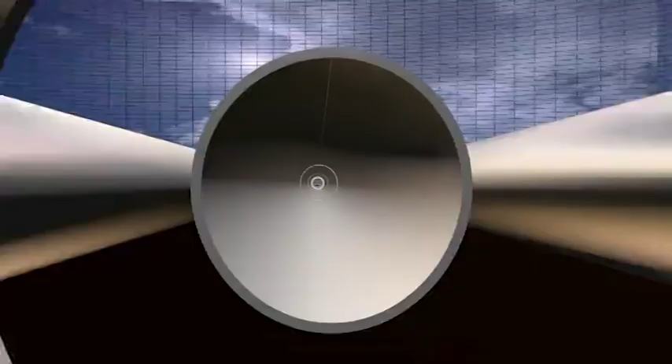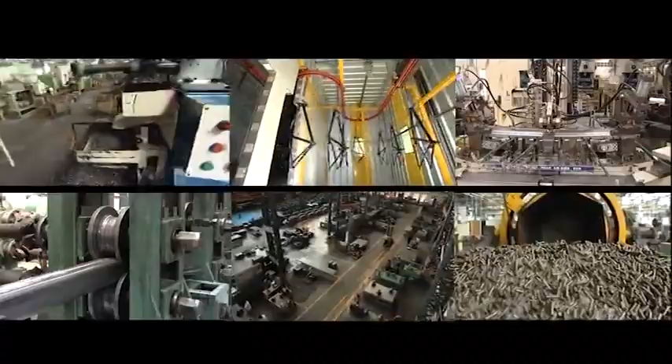One of the leading business houses in India, the Murugappa Group is a diverse conglomerate with interests that span many industries. Since 1949, Tube Investments of India Limited, the engineering arm of the Murugappa Group, has grown into an enterprise with a turnover of 5,000 crore Indian rupees, with products ranging from bicycles, automotive parts, chains for two-wheelers, industrial chains, and railway structurals.

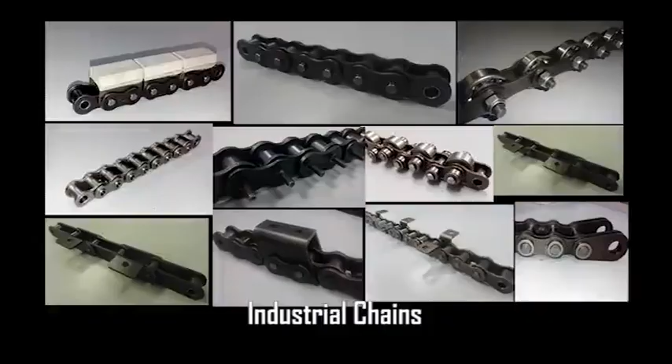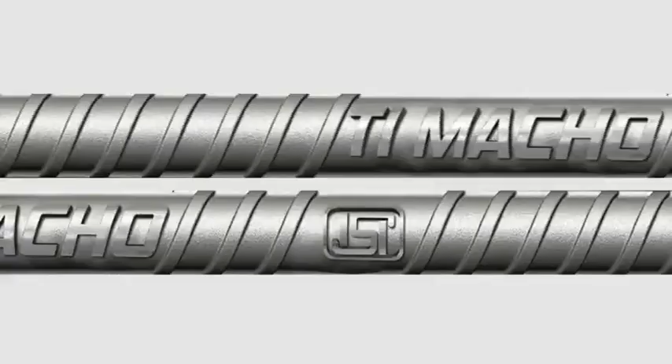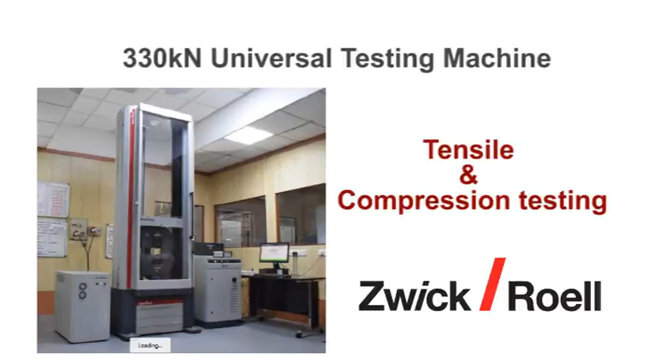The value-conscious Indian customer is migrating towards higher quality, higher strength, higher performance structural steels in his quest for reliable infrastructure development. This is presenting a unique challenge to TMT bar manufacturers who are largely from the unorganized sector and has turned into an opportunity for TI. Marketed under the brand of TI Macho, TI has brought its quality definitions and processing standards for specialty steel, developed over 70 years of its existence, to deliver higher levels of performance in TMT bars.

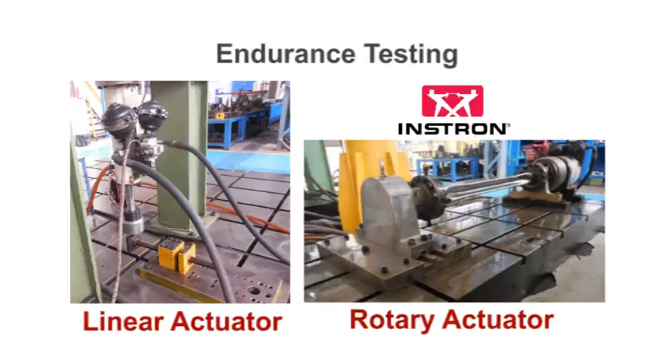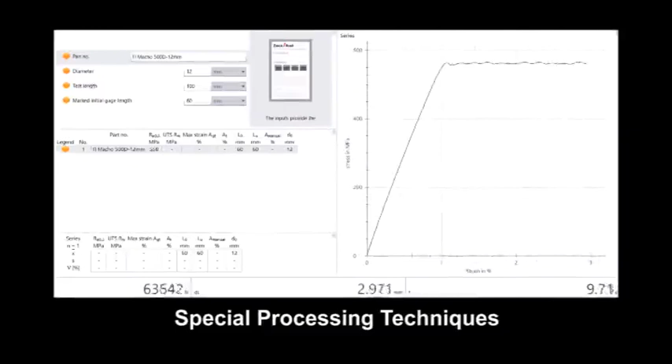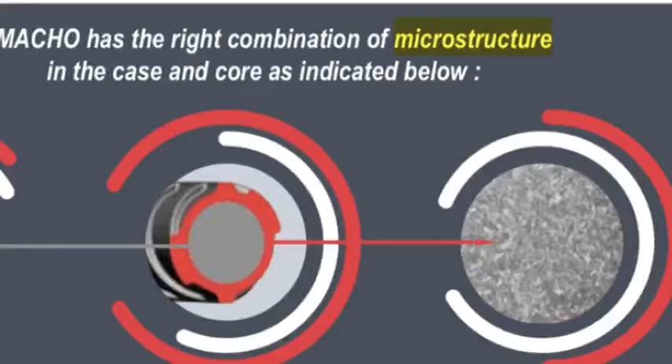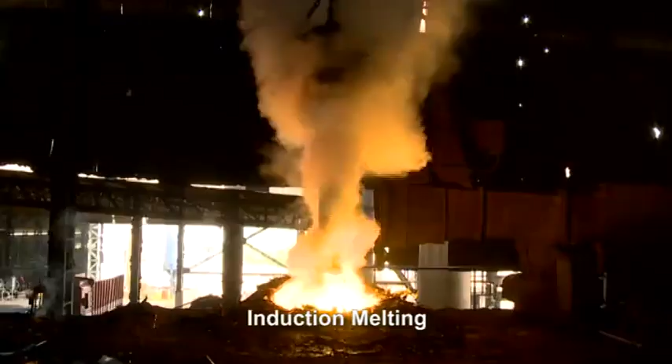The Technology Center of TI spent 1 year benchmarking the best TMT bars available in the Indian market by testing and identified desirable characteristics and performance parameters to be built into TI Macho TMT bars through special processing techniques. So, what is special about the manufacture of TI Macho branded TMT bars? High quality raw material with very low phosphorus and sulfur content is used with sponge iron to meet exacting chemistry requirements of liquid steel in induction melting furnaces.

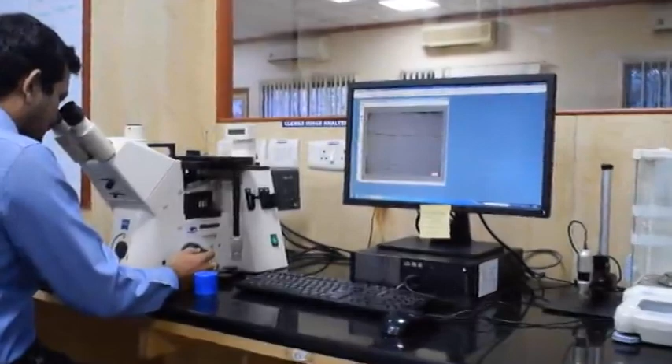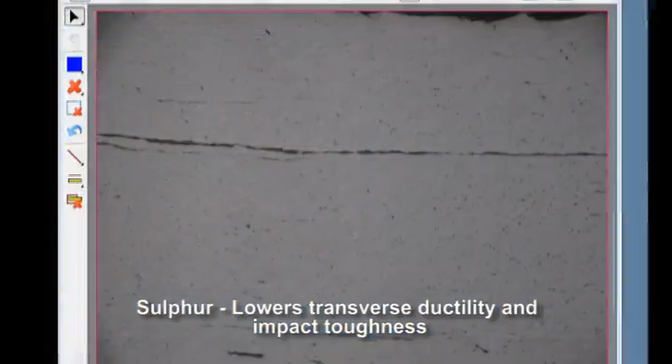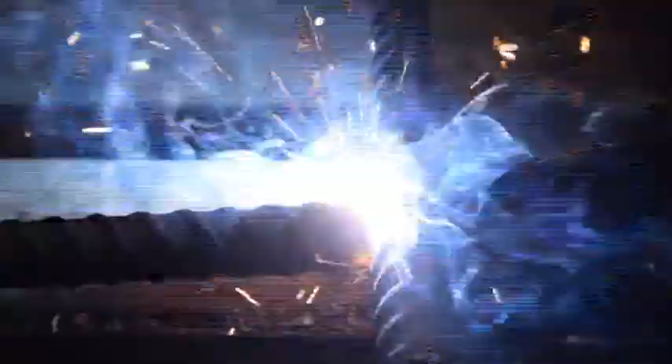Phosphorus and sulfur are impurities which bring down steel performance, and their limits are specified in the Indian standards. Sulfur lowers transverse ductility and impact toughness, both properties being related to shock resistance. Phosphorus, on the other hand, lowers ductility, toughness, and weldability in TMT bars. That is why TI Macho TMT bars routinely maintain lower levels of phosphorus and sulfur, which lets high strength be retained with higher ductility after heat treatment. It also allows the bars to be welded easily with no crack formation during welding.

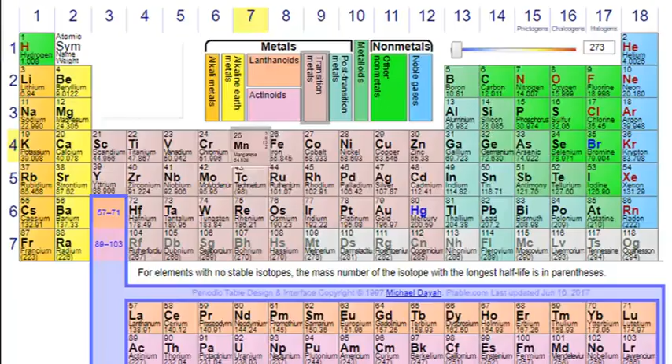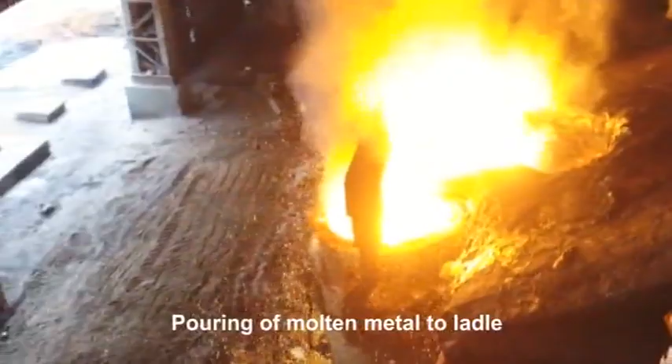Manganese is another element which helps increase the strength of the bar by promoting hardenability and increasing core strength. Manganese becomes all the more important as the diameters of the bar increase, and larger diameters of TI Macho TMT bars have higher percentages of manganese to help maintain higher strengths. The liquid steel is then transferred from the furnace into a ladle. The actual chemistry of each batch is checked by taking a sample from the liquid steel and verifying the chemical content using a spectrometer.

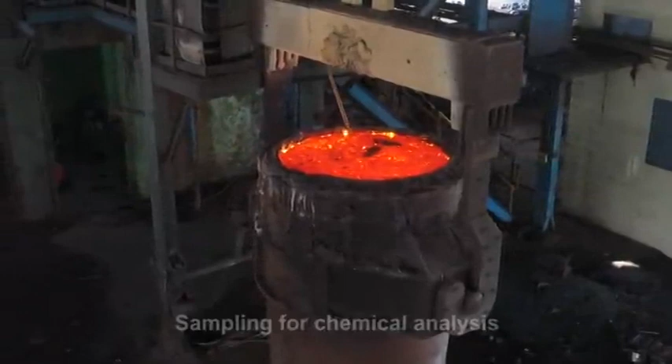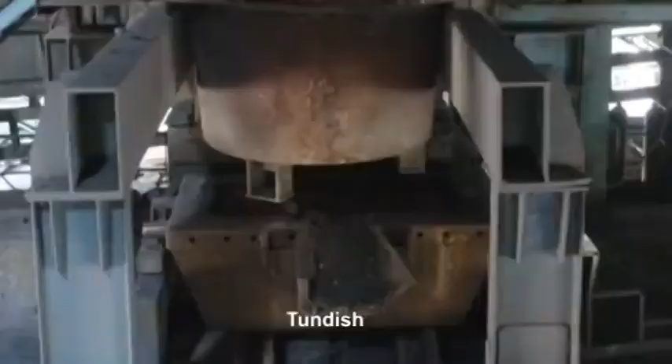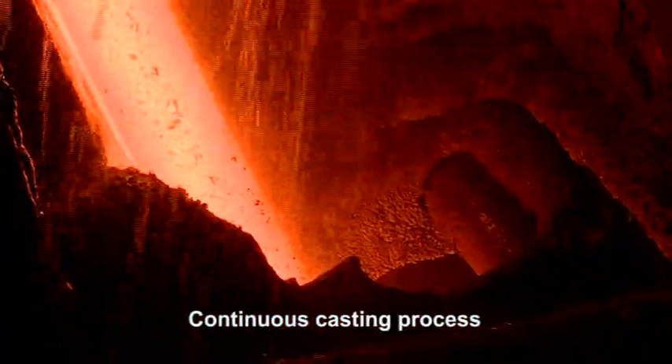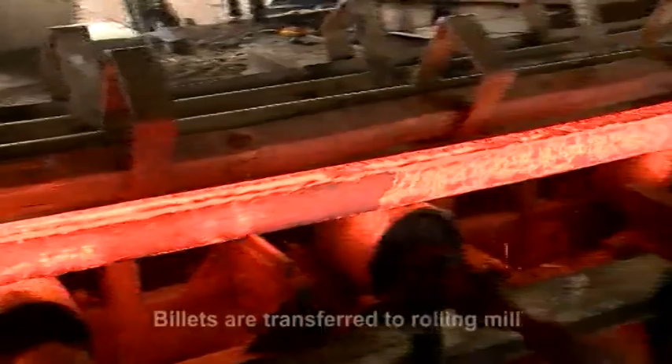Then, the ladle is emptied into a tundish, which is part of the continuous caster and which converts the steel into cast billets. The liquid metal is converted into billets of square cross-section and solidifies on the surface during the casting process. The cast billets are then rolled in multiple passes in rolling mills, which progressively changes the rapidly cooling cast structure of the billets into a hot rolled structure. In the final hot rolling passes of the mill, the ribs are formed on the surface of TMT bars.

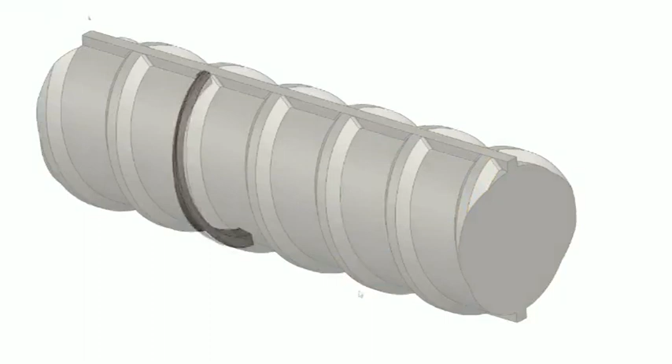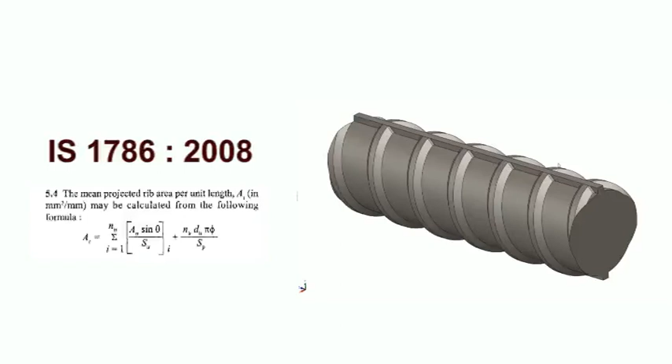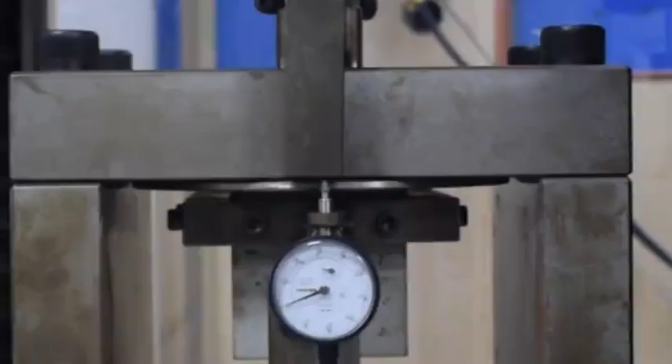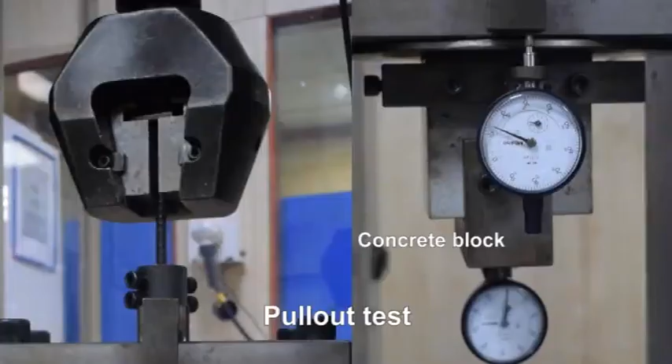The shape of ribs for the TI Macho brand TMT bars are specifically engineered to maximize the bond strength with concrete and are generally in accordance with international standards, meeting ideal mean projected rib area. The performance of rib geometry in terms of bond strength is routinely verified by type testing of the bars at the Technology Center by pull-out tests from blocks of concrete, where the force required to dislodge the bar is compared with bars of the same nominal diameter but without ribs. This kind of comparative pull-out testing is specified in the Indian standards, whereas the ISO standards specify the rib geometry permissible, which is independent of concrete characteristics.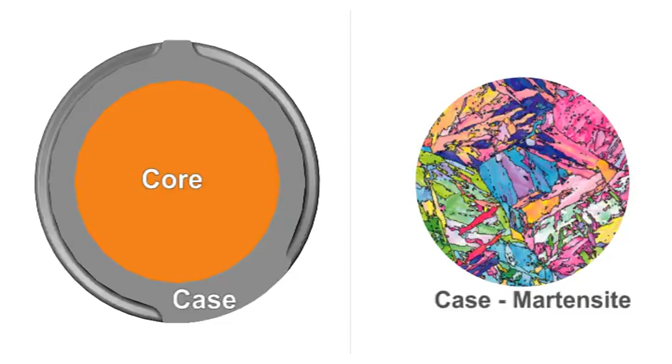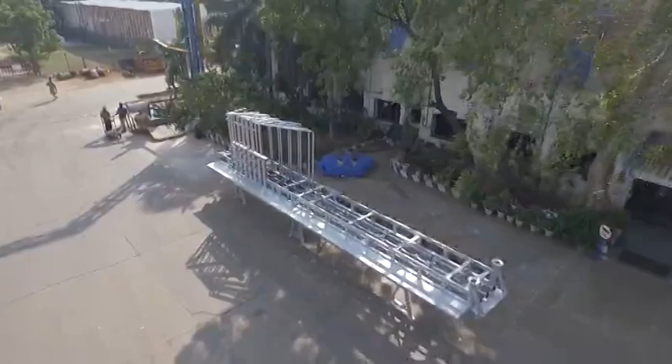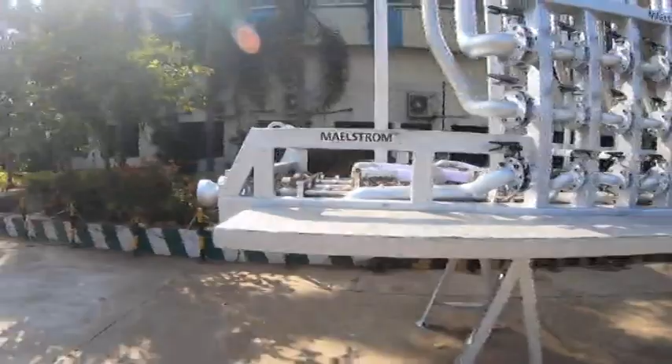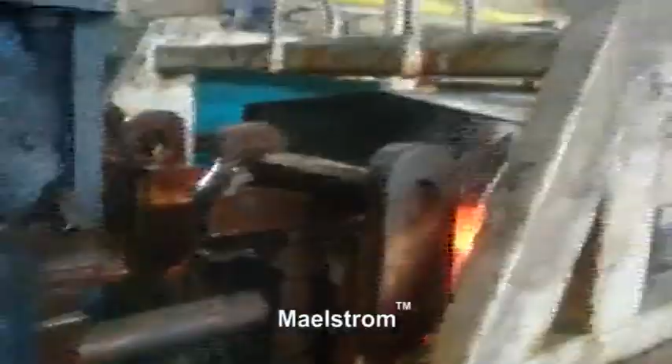Once the steel has been rolled to size, the surface of the TMT bars are quenched rapidly for a very short period of time, which converts a ring of hot steel on the outer surface to a hard structure called martensite, which gives excellent mechanical properties like strength, wear resistance and endurance to the TMT bars. TI has developed a unique technology of quenching TMT bars called the Maelstrom. This allows the TMT bars to be quenched 2 to 3 times more rapidly than in conventional quenching processes, resulting in the formation of very fine microstructures in the TMT bars, imparting superior combinations of tensile strength and ductility to the bars. This technology of quenching is unique to the process used to produce TI Macho bars.

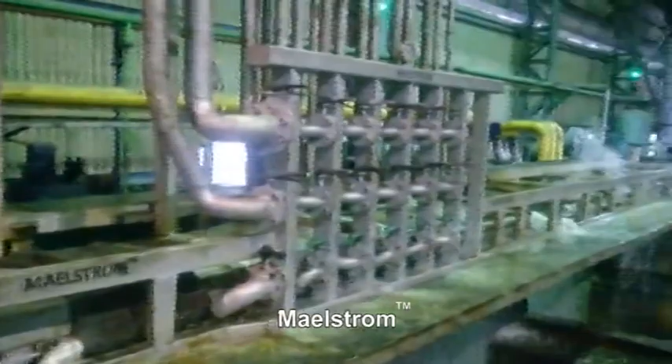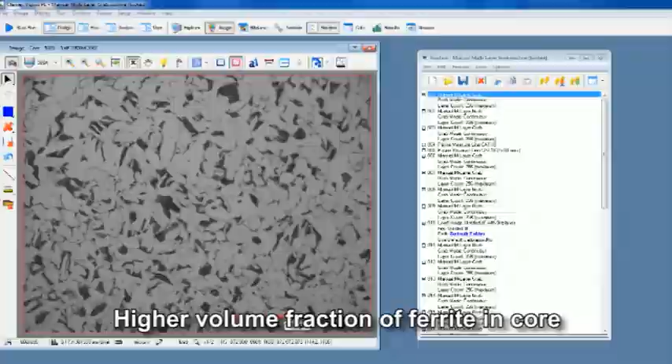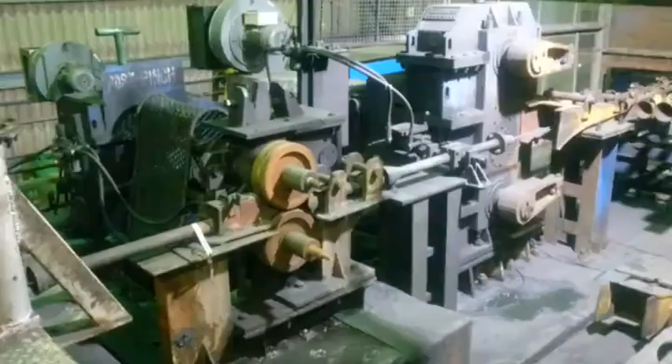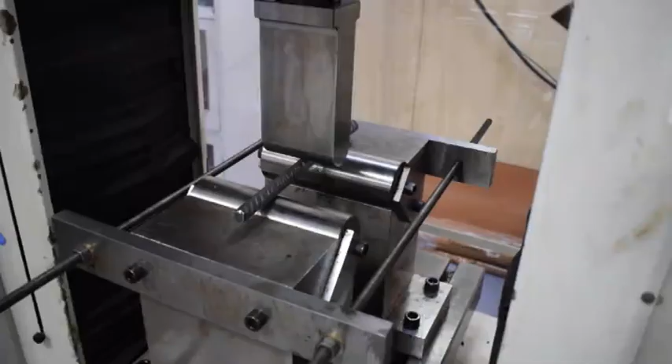It is the fine microstructure achieved through this quenching technology that gives TI Macho TMT bars their unique properties, along with the promise of raw material purity. The microstructure achieved is routinely tested for overall dimensions of case and core using microscopes and checked for optimal characteristics and hardness. The bars are then cut into 60-meter lengths on a runoff table. The core of the bar is then allowed to air cool, which allows the outer martensite ring to be tempered by the dissipating heat energy. Slow air cooling from controlled temperatures also results in the formation of a soft inner core, which gives the TMT bar strength, combined with the ability to bend without cracking.

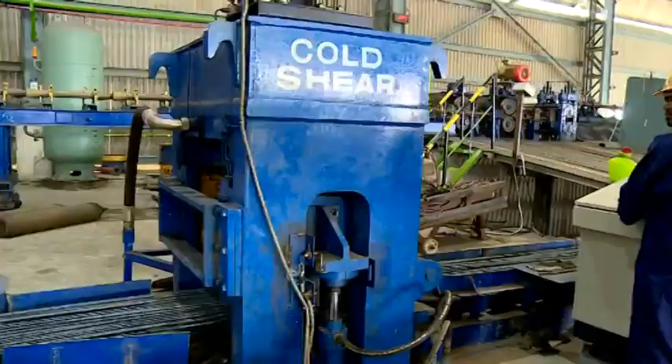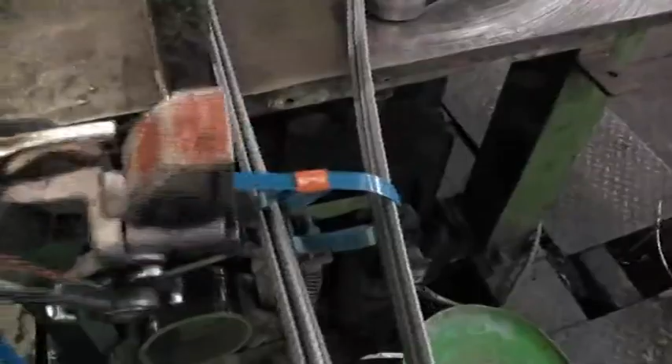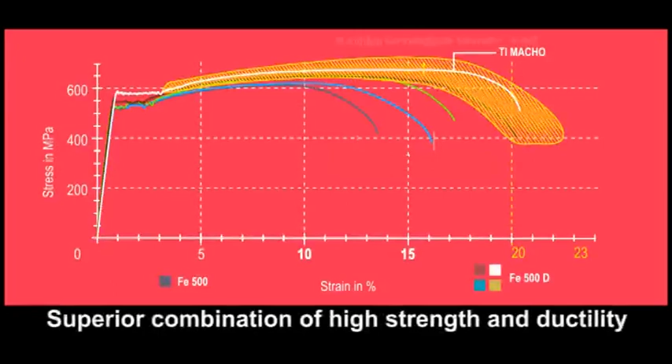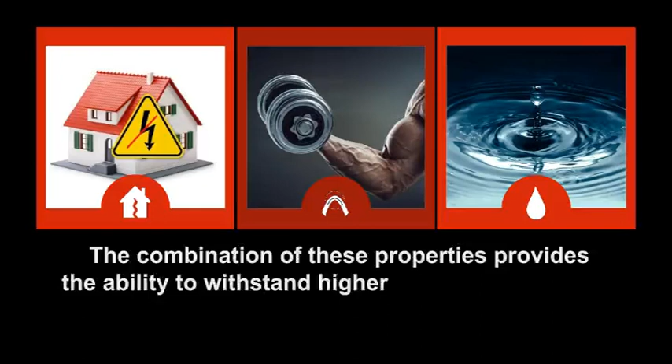After cooling on the cooling bed, the bars are cut to sizes of about 12 meters and then bent and bundled for shipment. Mechanical tests are done on each batch of TMT bars. The ultimate tensile strength, yield strength, and elongation property are measured during these tests. TI Macho TMT bars give a superior combination of yield strength, ultimate tensile strength, and percentage elongation when compared to other bars available in the market. The combination of these properties provides the ability to withstand higher shocks, higher loads, and increases structural life of buildings.

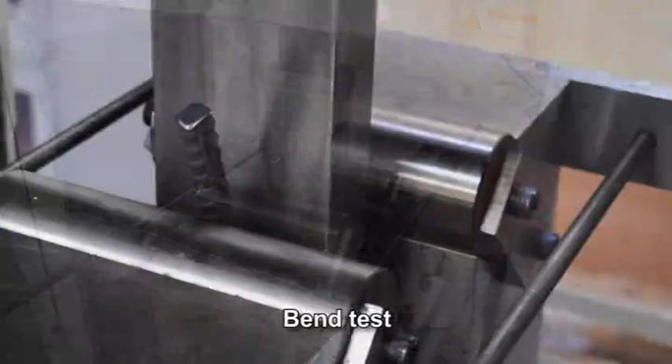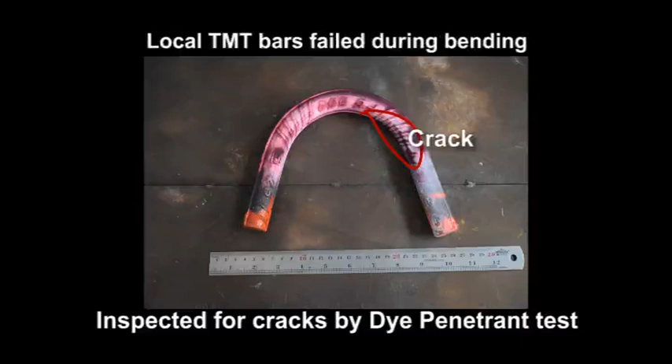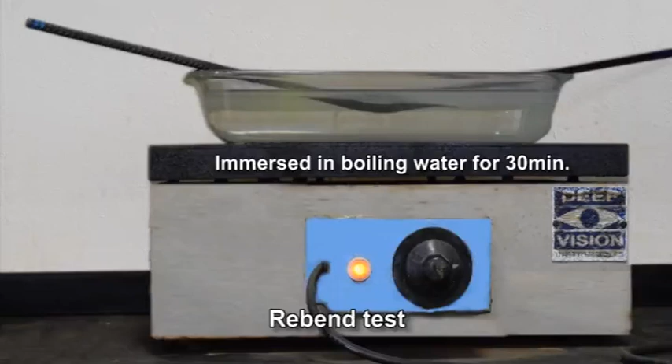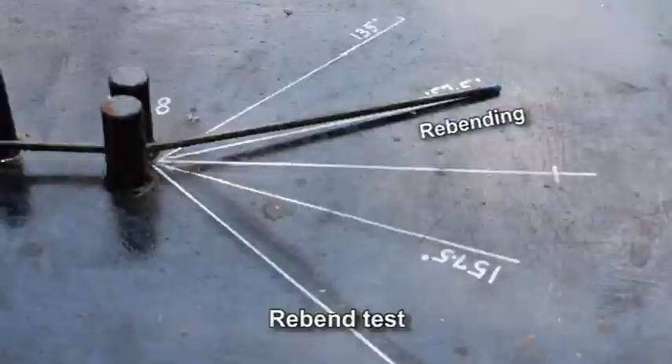Test pieces from each batch are also put through bend tests to check whether they have sufficient ductility. This ensures that the TI Macho TMT bars can be bent without cracking. It has been observed that many local brands crack on bend testing, especially in the cases of larger sizes. The Indian standards also specify a rebend test, where the bar is bent to an angle of 135 degrees. Then the bent portion is immersed in boiling water for 30 minutes. And then the bar is rebent in a way to open out the included angle to 157.5 degrees. The TI Macho bars easily pass this test as their microstructure is finely grained and their residual stresses are very low.

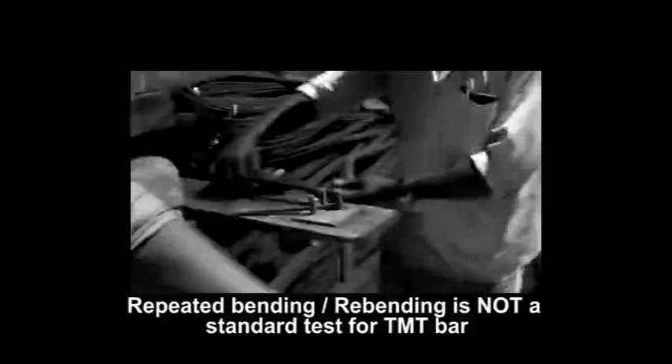Some local manufacturers misinterpret the rebend test specified by the Indian standard by repeatedly bending and rebending the bars and claim that it is a measure of superior quality. But this kind of testing does not prove anything, as this is not a performance requirement for the bar.

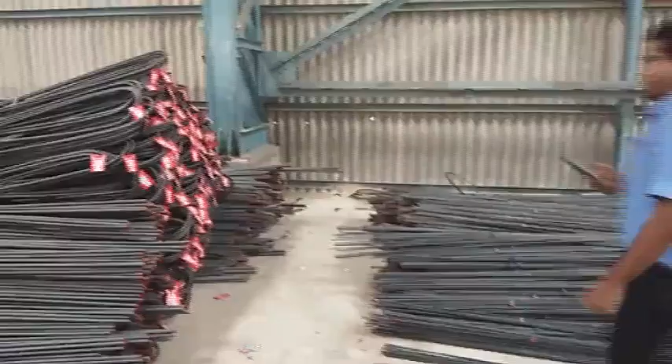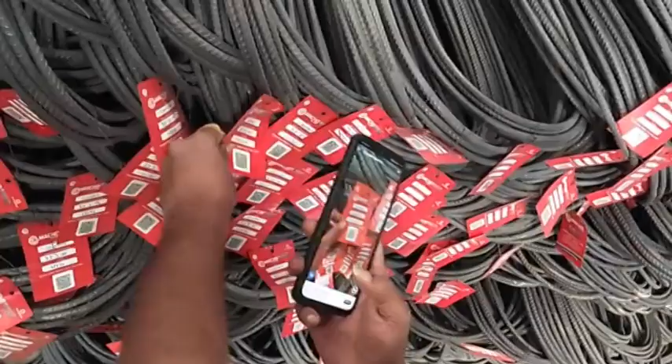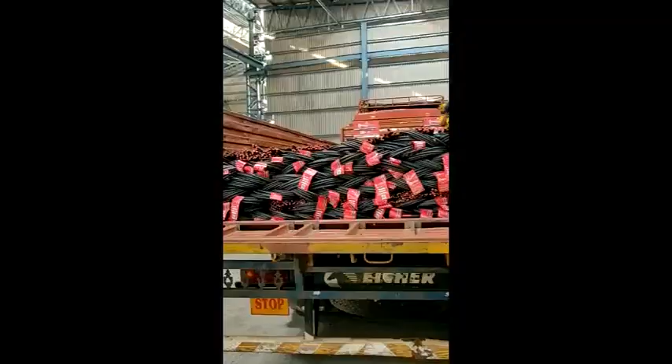TI Macho TMT bars carry traceability to the property ranges achieved during manufacture. Each bundle is tagged with a Know Your Right tag, which allows the customer to directly access the inspection records available on the internet. These bundles are then sold to the customer through our extensive dealer network. These are some of the reasons why you should consider buying higher quality TI Macho TMT bars for building a house of your dreams.